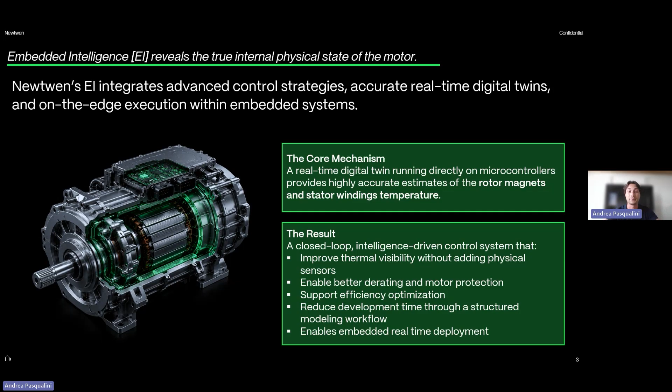Before passing the word to Francesco to dive deeper on the technology, maybe we can spend a couple of words on who Newtwen is. Newtwen was founded in 2020 in Padova, which is a city located in the northeast of Italy. And our mission is quite unique, and is to enable real-time thermal awareness

inside the embedded systems. Our expertise combines mainly three domains that traditionally operate separately. In fact, we have expertise in multi-physics simulation, embedded control systems, and AI and machine learning for physical systems. The result of this expertise is Twin Fabrica, which we will see shortly.

Twin Fabrica is our software platform that was designed and developed to develop, validate, and deploy embedded thermal digital twins inside the microcontroller units of your components. What makes the product unique is that the workflow is designed end-to-end. In fact, in Twin Fabrica, you can start from a CAD geometry and finite element simulation, and it will bring you with a unified workflow all the way to deployment on embedded hardware.

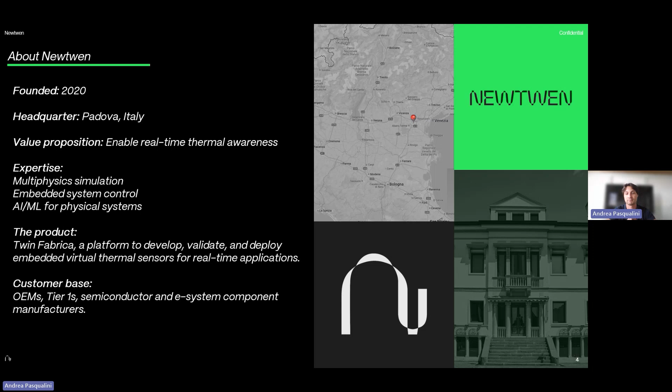Currently, we are mainly working with OEMs, tier ones, semiconductor companies, and electromechanical system manufacturers. And the common challenge that we are seeing with these customers is how do we bring physical intelligence closer to the real-time control.

Today, the webinar will be focused on eMotors, but the approach can be applied to different applications as well by using the same methodology in inverters, batteries, onboard chargers, power electronics, and other thermally constrained embedded applications. You can improve the thermal visibility and therefore the controls and the derating strategies of your components.

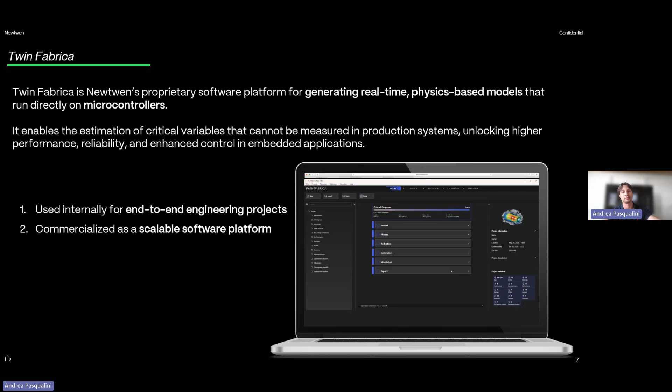As mentioned, super briefly, Twin Fabrica is the engineering platform that powers and empowers this entire process. It allows us and our customers to transform high fidelity physics into executable embedded intelligence. It's mainly used by ourselves, but it's also used by our customers. The workflow looks like this.

Everything starts from the physical system, from the CAD geometry that is imported directly into the platform. Second, the finite element simulations are created to capture the thermal and physical behavior of the systems. Third, model order reduction techniques compress those high fidelity simulations into lightweight real-time models. And then there is the AI piece, the AI calibration that is used to refine the model accuracy using ground truth experimental data. The final step is the export. The final code is deployed directly into the target embedded hardware.

I think it's important to mention that the importance here is not the individual steps, it is the continuity of the workflow. In fact, instead of having disconnected tools and fragmented validation loops, Twin Fabrica and its process becomes integrated from simulation to the embedded deployment. Of course, you can imagine how this workflow dramatically accelerates development cycles while at the same time improving consistency between virtual and real-world behavior.

Now that I saw that some people joined, maybe we can revisit what we have seen in the first slide, so the original problem, with a slightly different perspective. The challenge, as we mentioned, is no longer only thermal protection. The real challenge that we are seeing today is thermal visibility. When internal physical states remain hidden, systems are forced to operate conservatively. But once the embedded system gains real-time thermal awareness, entirely new optimization strategies can become possible. Control systems can become adaptive, and the derating can become dynamic.

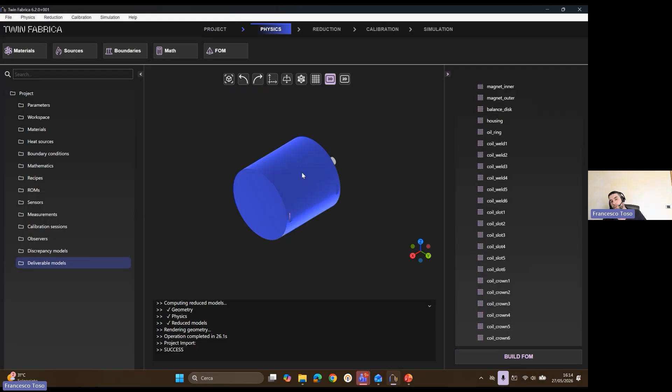Let's see the workflow. Let's see the process of our technology and why we claim that thanks to this platform, we make scalable the process of bringing high fidelity simulation models inside the microcontroller units. So everything starts from the import of your high fidelity simulation. So it means that the geometry is already present. Here I can show you an example.

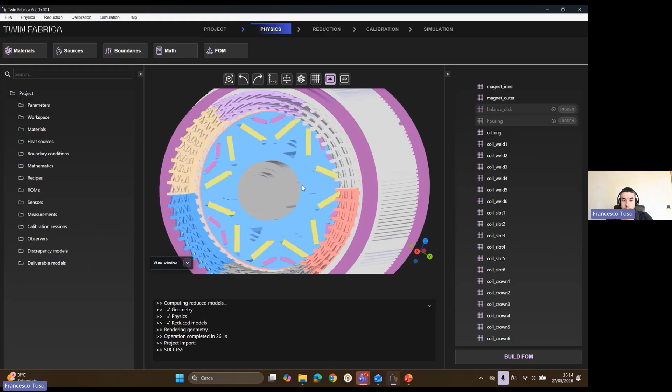Inside Twin Fabrica, there are many software libraries. One of them is a CAD kernel that allows you to do all the Boolean operations in order to import the STEP file, but also other CAD kernel file formats. This is one of the inputs that you can select for your final geometry. In this case, this is an IPM, interior permanent magnet, with hairpin technology.

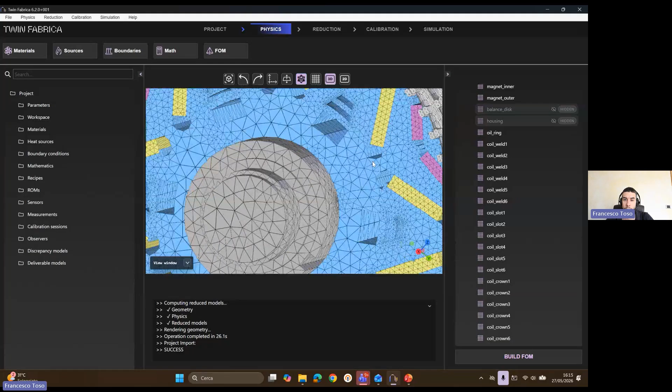It's oil spray cooling technology for this particular motor concept. There is another input, the mesh file, so you can directly import the mesh file from ANSYS Fluent, COMSOL, STAR-CCM+, doesn't matter. Or you can basically create the mesh inside Twin Fabrica. So if you want to start from the geometry, there is no problem.

Inside Twin Fabrica, there is also the mesh generator engine that allows you to create a 3D mesh for finite element analysis and to solve the partial differential equation related to the heat transfer. Why the heat transfer? Because temperature is the state variable most critical for and most tied to safety and to performance. In particular for oil spray technology, you would like to estimate the hotspot across the windings configuration. You would like to predict the temperature in the magnet in order to avoid demagnetization and losing efficiency in an irreversible way.

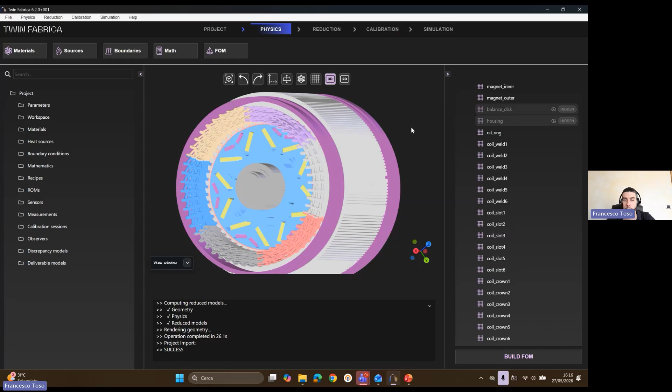There are many reasons why temperature is very relevant for electric drives, mostly in automotive, but not only. And also the problem is that the state of the art of hardware, the classical NTC placed in the winding or in the stator stack, is not enough to predict the hotspot dynamics, the hotspot resolution across this motor technology. And most of the time, you cannot measure directly in the spinning part, the rotor where you have the magnets. However, our companies have very good models.

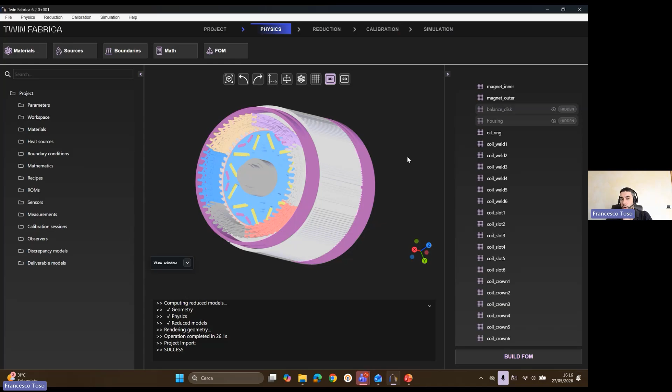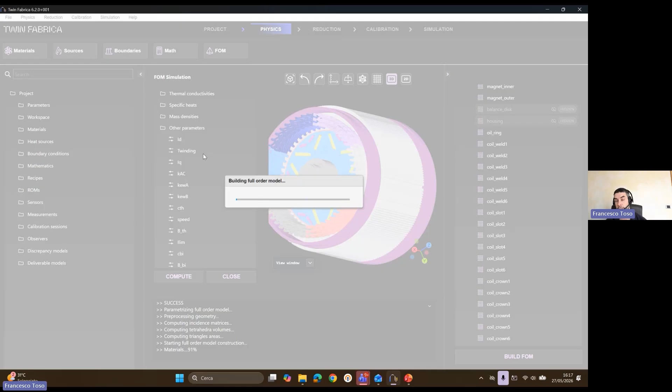So in fact, the first step will be the integration inside Twin Fabrica of the high fidelity simulation model. And with that, as we can see in this case, you can compute changing boundary conditions, material properties, heat sources, etc. You can perform the high fidelity simulation, solving the partial differential equation related to this finite element model. It means that inside Twin Fabrica, we also have the FEM solvers to solve the distribution of the temperature, the heat transfer equation, in order to get the temperature solution across our electrical machine.

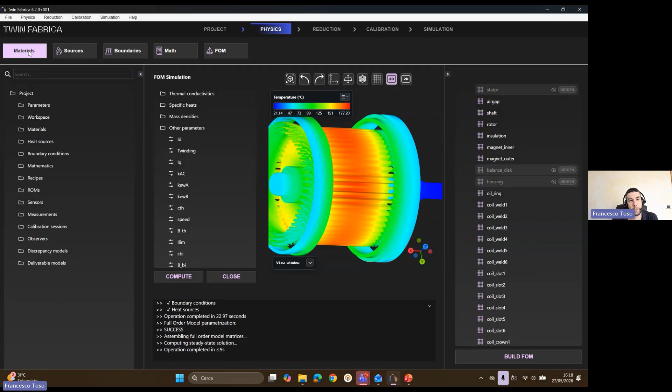So as you can see, for the sake of time, this was just a steady state simulation computed on my laptop, but with Twin Fabrica you can simulate also transient, frequency domain, steady state, whatever, and you can use it to double check if the input of the model has been set properly: the material properties, the heat sources, and the boundary conditions. However, this is just the first step.

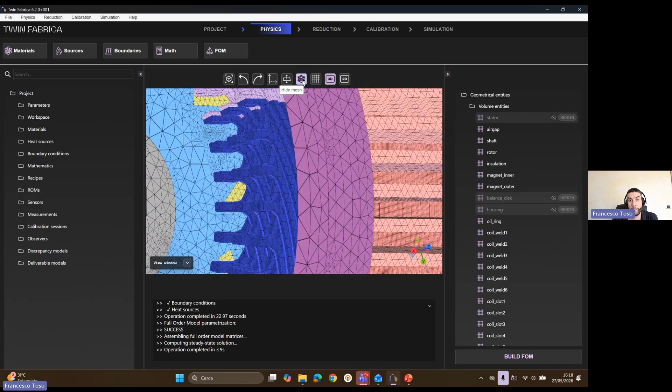The scope is to basically create a model that can replicate this kind of behavior in real time. This model is quite good. It has, in this case, more than 1 million degrees of freedom, coinciding with the nodes of the mesh describing this geometry. But these kinds of models, for memory reasons and computational requirements to solve the algebraic equations of the finite element analysis, of course don't run inside a microcontroller unit.

There are tools, there are methodologies, and inside Twin Fabrica in particular, we have implemented a nonlinear model order reduction library, the first commercial nonlinear model order reduction library available in the market, which can easily tackle, for example, radiation and advection. So considering this kind of physics in the finite element analysis of your model, as well as temperature dependency, material properties that depend on temperature, as well as the heat sources. So in this case, using our model order reduction, you can obtain a model of just 31 differential equations describing the full order model of more than 1 million degrees of freedom.

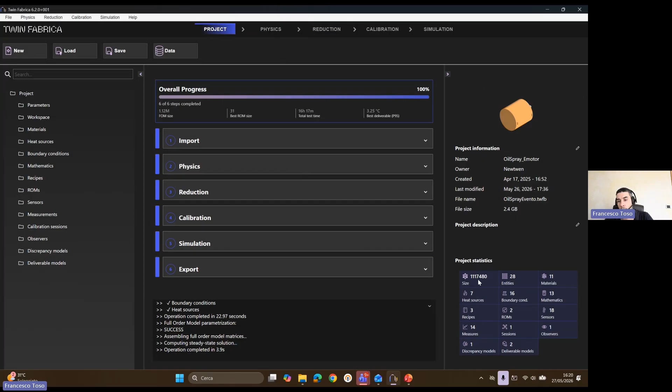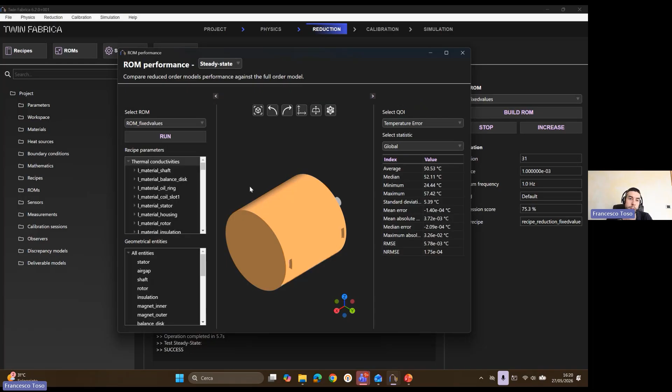And what you can do inside Twin Fabrica is the analysis. So basically you can evaluate the fidelity of this reduced order model with respect to the full order one. For example, you can run several conditions, steady state, frequency domain, or transient, to double check if the accuracy of the reduced order model with respect to the full order one, changing once again boundary conditions, heat sources, material properties, and so on, is good enough. So in this case, you can see the error plotted. In every single node, you can see the error between the full order model and the reduced order one.

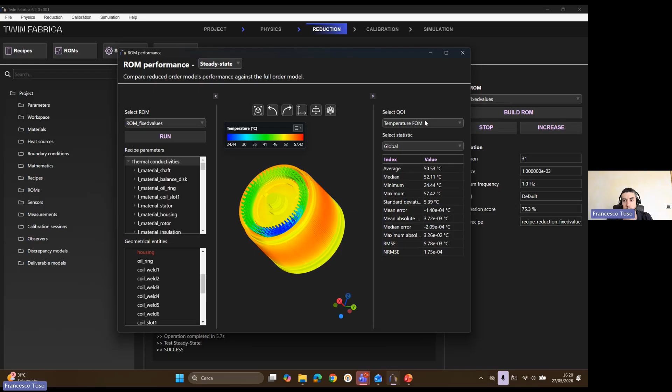And if you go here, you can instead see the temperature distribution of the full order model with certain boundary conditions and heat sources, and the temperature distribution solving the model of just 31 equations, but then projecting the solution back onto the full mesh in order to get the resolution of the temperature gradient.

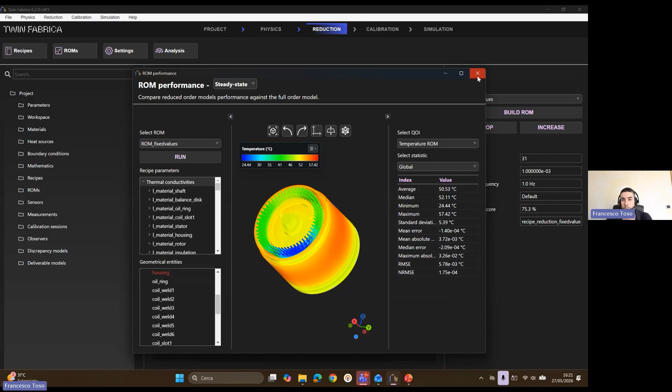So let's say this is a kind of analyzer of the fidelity of the reduced order model with respect to the full order one. So how good is the surrogate model, the compressed version, in order to address real-time feasibility inside a microcontroller unit? Because now this model size is quite manageable for a microcontroller.

And you can compare the fidelity of this reduced order model on several simulations. Recipe, you can change many things, whatever you want. You can do your sensitivity analysis with respect to the full order one, so with respect to the first high fidelity model. However, this is not enough, right?

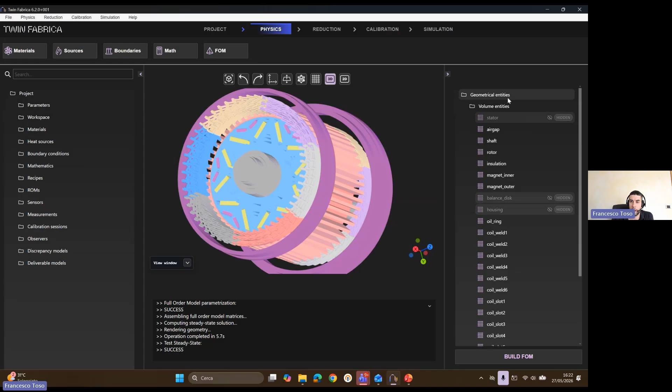Because we all know that the high fidelity models, the design ones, are good, but they do not represent the model as manufactured. Why? Because maybe there are some nonlinearities that have not been taken into account. Because the heat sources, so the power loss distribution, have some uncertainties or some error with respect to reality, or because some material properties are not known 100%.

So there are many reasons why, when we go on the test bench and we measure with a thermocouple, for example, across this winding, the temperature behavior of the measurement setup and the experiment and the simulated one differ. They have some error. There is some residual, because the perfect simulation doesn't exist, right?

So the fidelity that the reduced order model can achieve in its first instance is compared using the ground truth, that is the simulations, so the full order one. Now we need to move a step ahead. We need to calibrate this full order model or the reduced order one. Of course, it's much cheaper from a computational point of view to calibrate the reduced order model, which is still a physics-based representation of the full one.

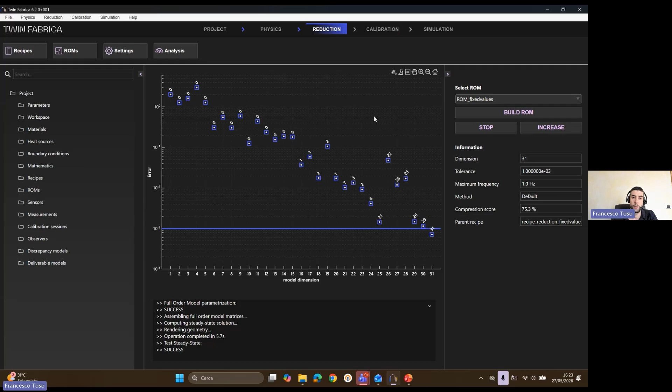So what do we need to calibrate? To calibrate, we need, in the first instance, to place sensors in the exact position where the real experimental setup is measuring. So, for example, in this particular case, we are positioning the virtual sensor. We are selecting the node of the mesh as close as possible to where, in the real test bench setup, the thermocouple has been soldered.

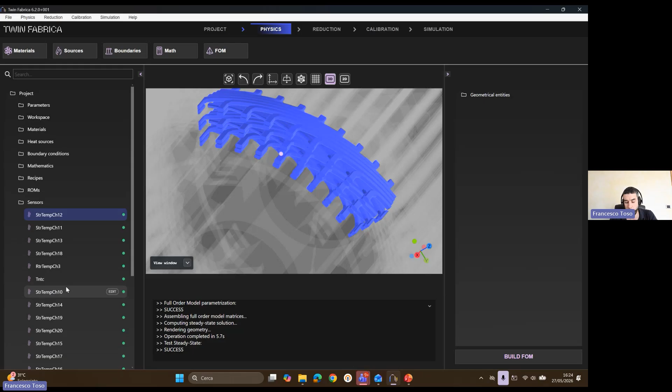And why are there several sensors here? Because in this case, we are talking about a special prototype that the customer has used to collect the data, to do all the functional testing. And they are measuring so many sensor points in the stator winding, mostly in the end winding and in the core, because this coolant system was an oil spray one. So it's very hard to simulate the oil spray CFD to get the right heat transfer coefficient map.

In this case, the customer preferred to get a good experimental data set. So they did a really very good campaign, checking the temperature in multiple points. In this case, they have generated many virtual thermal sensors, because the aim of the customer was to have all these virtual thermal sensors in production, not with the real thermocouple, but just with a piece of software.

So from here on, the next step would be to transform a model as designed into a model as manufactured in terms of accuracy. We need to achieve industrial grade accuracy to rely on virtual sensors as if they were the real ones, okay? So in this case, the first step was to place the virtual sensor exactly in the same geometrical position where the real sensor setup has placed the thermocouple, the PT1000, whatever sensing technology you're using in your test bench.

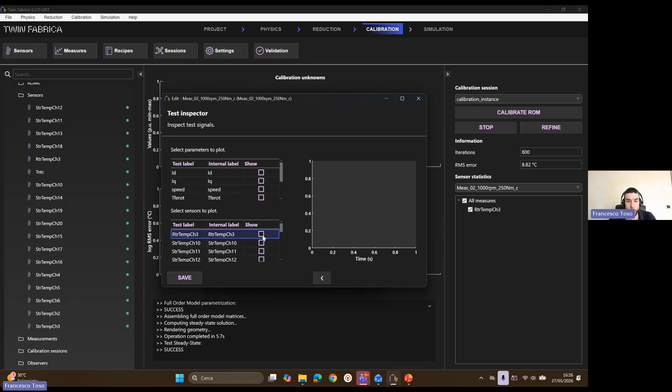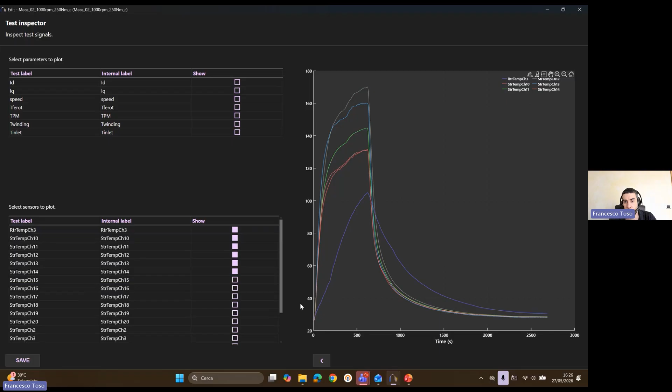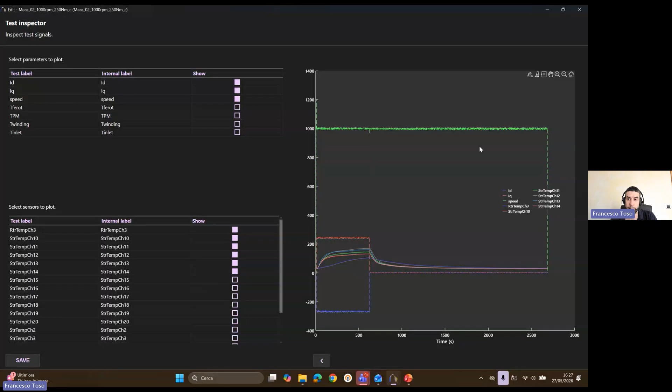And what you can see, for example, is the different, I can enlarge the screen, behavior of the stator in different points and also the rotor, given certain ID, IQ, and speed profile, okay? So these are the classical data sets where you have the phase on and the phase off in order to record the free evolution of the system. This is a classical measurement setup, temperature recording and electrical variable recording, in order to use this data to calibrate our model.

So once you have imported the data, the next step would be to calibrate. So we will calibrate the reduced order model through Twin Fabrica. Inside Twin Fabrica, there is also an optimization library, which in first instance will calibrate the physical parameters, so material properties, heat sources, boundary conditions, potential uncertainties that you want to model, to get the right accuracy with respect to the real test bench.

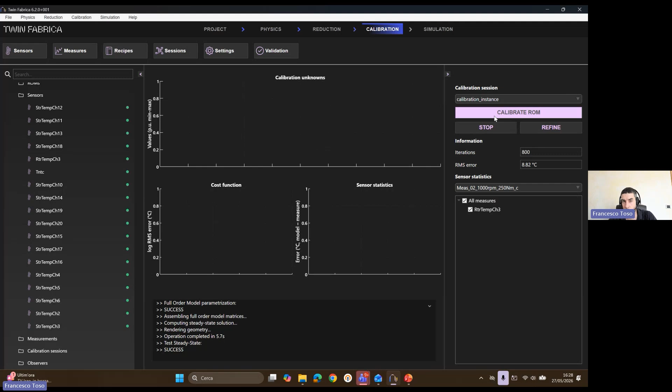However, sometimes just a physical calibration, so just moving material properties and boundary condition uncertainties, is not enough. Because many times, mostly for the electric motor case, in the microcontroller unit, where you have to implement your model and control the final thermal behavior of your electric motor, you don't have some relevant information to simulate the thermal model. Just an example, the coolant flow, or the pressure of the oil, or the temperature of the oil itself.

Most of the time, these variables that are relevant to model the boundary condition of our model are not available, and they are not constant. So we cannot imagine to place them like a constant value of the coolant flow and the coolant temperature, for example, to impose 10 liters per minute and 50 Celsius degrees, because in the real application they are time varying and most of the time unknown, in the sense that these two variables in the microcontroller unit where the final model must be implemented are not known. So in this case, you have to do something more.

In this case, you have to enhance, you have to empower, if you want, your physics-based reduced order model with an edge AI one. So with a specific data-driven model, and we have a set of libraries of them that you can directly use together with your reduced order model in order to train the parameters of this edge AI model to infer the unknowns, or the residual between the calibrated physics-based model and the ground truth data.

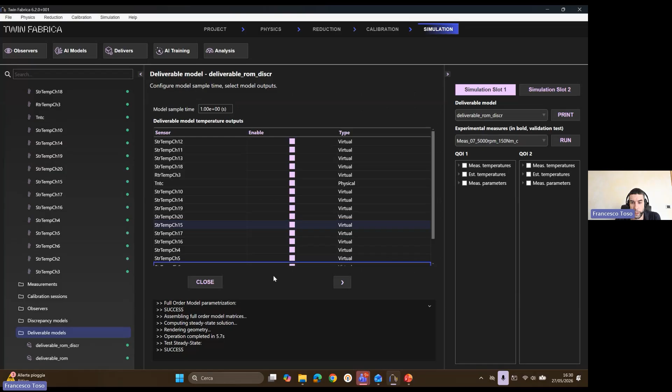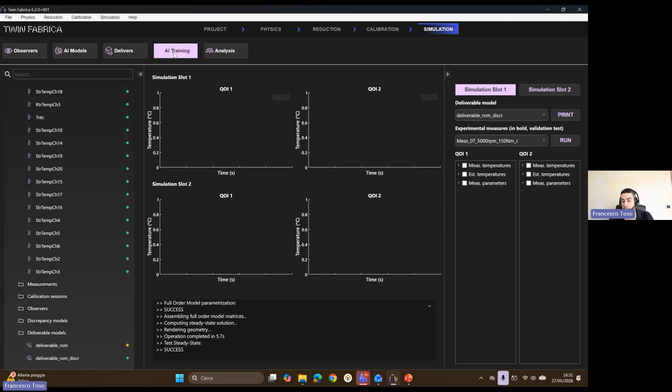So in this case, let's see if we can execute, yes, let's enhance the reduced order model with an AI one that we have already trained. Also inside Twin Fabrica, you have available the trainer of these models. So in the same identical platform, as you can see, you have many libraries, a very large technology stack of software where you can manage everything from the import of the CAD to the code generation of the firmware to program your microcontroller unit, which we will see in a moment. Passing through also the training, so there is also the artificial intelligence model trainer inside Twin Fabrica that you can directly use with no code.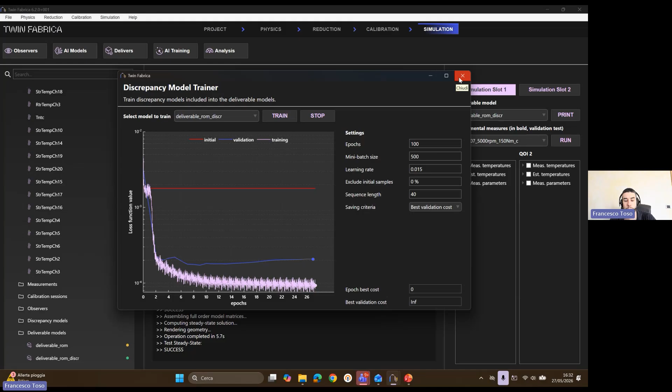Like in this case, you can set which tests from the ground truth measurement to use for calibration and for validation, and you can set some of the hyperparameters and press train. And in a couple of hours, 1 hour, it depends on the data set and on the size of the model library that you choose, it's capable of calibrating the parameters of the network.

It could be different kinds of networks that you can select, attached with the physics-based ROM in order to enhance the accuracy. So now, if we have a look, in violet with continuous line we have, let's make a zoom, in order to get the error during transient. For example, in continuous you have the IR camera recording, and in the dashed line you have the model estimation. Of course, you can see the error in all the temperatures.

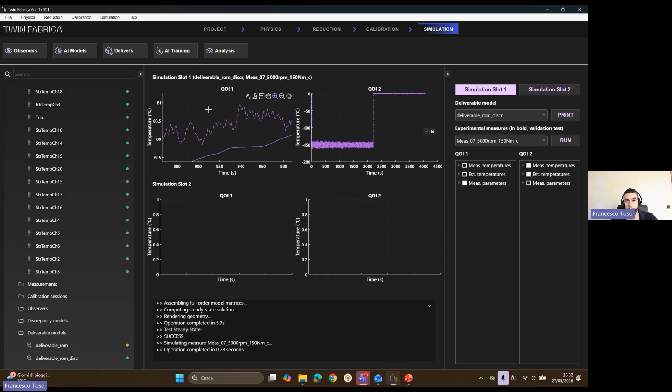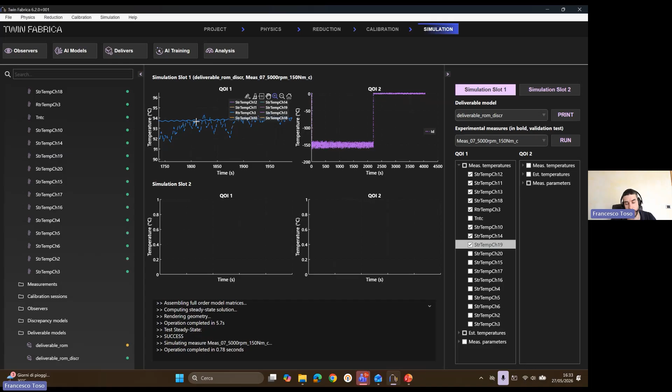So we can see, for example, in this case it was an oil spray cooled. If the distribution of the temperature is preserved, as you can see, the model is quite good in predicting the temperature compared to the one of the NTC or the thermocouples. And if we change test, we can go higher with the speed. Of course, the accuracy is preserved. In this test, maybe also the coolant flow was changed. Who cares? It was not an input of our model. However, this dashboard gives you the feeling of how good your model is, how robust it is, and if it is industrial grade.

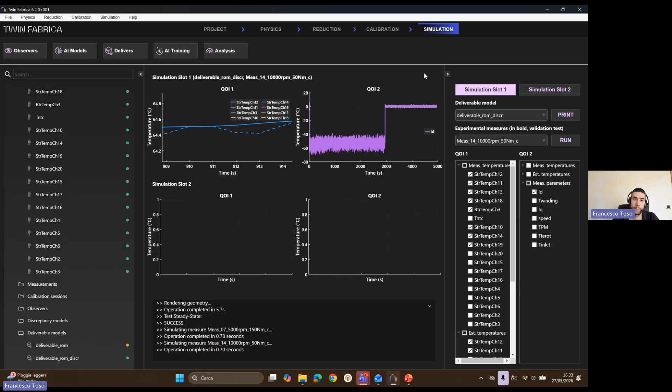So once you are satisfied, the last step to do is the export. You can go back into the first dashboard here, and you can export the model using a Simulink white box block that can be directly plug and play into your motor control Simulink simulation model, or we can directly generate the C code, so a firmware library that can be easily compiled in order to program your microcontroller unit, with the documentation and the library, in order to integrate the final model into your hardware system.

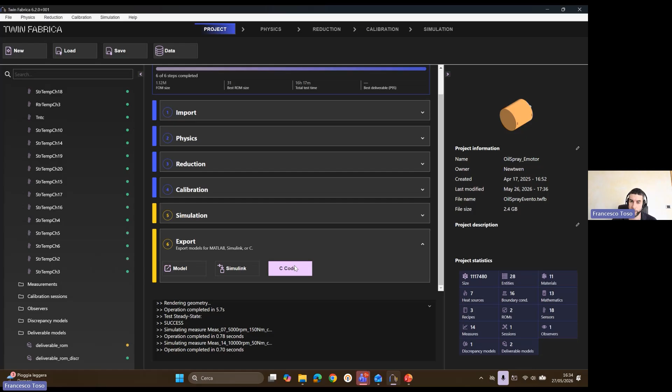So this was just a recap of how to operate in Twin Fabrica and why it's relevant to get a model that is capable of predicting the temperature in the hotspot, in this case the end winding and the core winding, but also in the magnets. And why is it relevant? Because at the end, what we want to do is unlock the motor efficiency. Using the same hardware, we want to obtain a software layer capable of properly managing the ID and IQ current references, such that you still satisfy the PI controller of the speed, so the torque request from the slow loop controller of the electric drive, but you increase the efficiency.

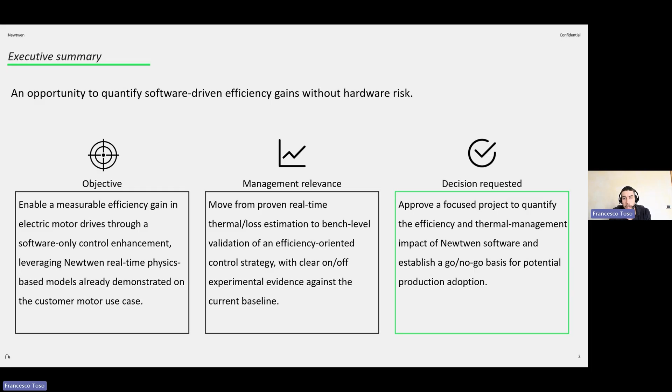Why? Because this is the goal of our customers. We want to improve the efficiency and have a very good thermal management of the hotspot and of the temperature of the magnet. To do that, usually our customers have lookup tables. You go on the test bench and define very large 4-dimensional lookup tables. So you have ID, IQ measurement, the speed, you measure the temperature maybe in the NTC in the stator, and you try to move ID and IQ on the test bench in order to record the torque request with the minimum loss in the system.

Other customers instead go in a more raw way: for them, the minimum loss is the MTPA, the max torque per ampere. However, this is not true, at least not for all the points. For example, when the speed is in a medium range and torque is low, which is quite the case for the automotive sector, an operating point where you spend a lot of time in the lifetime of the motor, the MTPA point is not the most efficient one, because the iron losses and the magnet losses count more than the Joule losses. So you prefer to change ID and IQ to move to another point preserving the same torque but minimizing the iron and permanent magnet losses. Most of our customers do it by experiments. Others don't; they go just MTPA and field weakening.

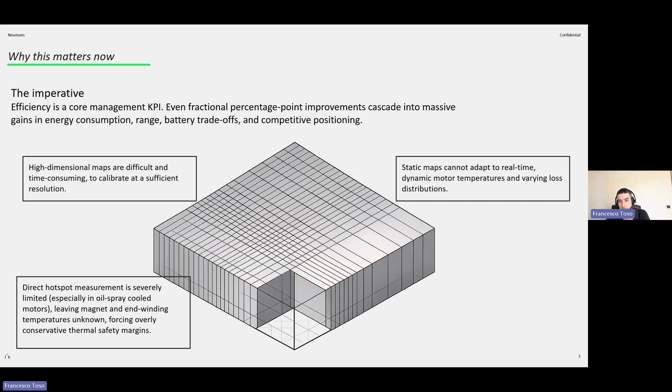So even if you have a very good, high resolution lookup table calibrated by means of real experimental results, and you implement this huge lookup table inside the microcontroller unit, most of the time you're not precise enough if you don't have a precise thermal model predicting magnet temperature and winding temperature. Why? Because it's relevant in order to place the right point inside this LUT. It's the input.

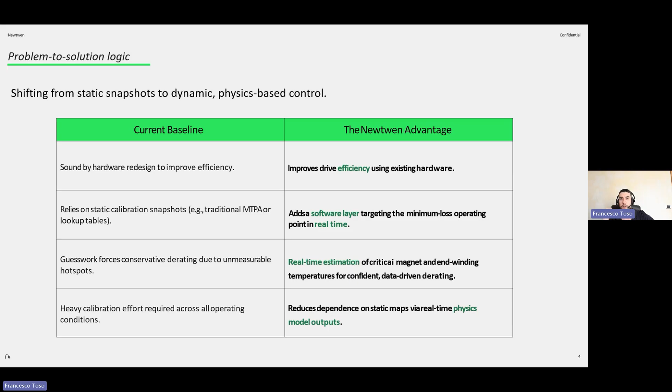So what we propose instead is to implement our model. Instead of having lookup tables, the input of our reduced order model is the power loss. So we still have a power loss model, an analytical version of the losses distribution inside the system, that can be quite well calibrated on the test bench, at least the total losses. The distribution will be validated through the thermal behavior. And you can use this model in closed loop control to enhance the efficiency. Now we will see how we do that.

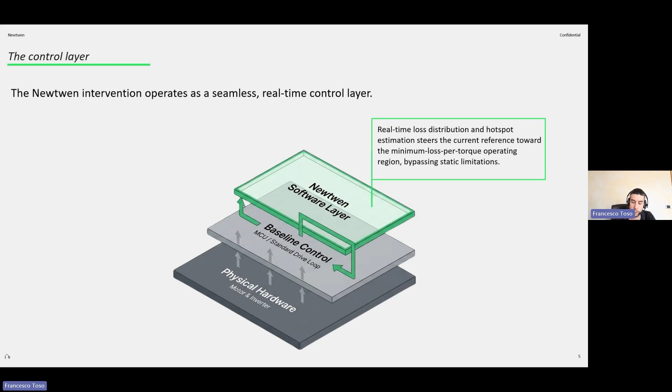Once you have finished with the model generation, as I've shown before, it's quite easy to generate C code. This C code will be a software layer that is quite non-invasive for your motor control strategy, in the sense that we do not touch your MTPA, we do not touch your PI controllers, we just sit on top. This firmware layer can be easily implemented within a task of 1 millisecond or 10 milliseconds of your electric drive, and it will take as input the ID, the IQ, the speed, and the temperature of the unique motor sensor you have there.

As I mentioned before, inside there is the power loss model and the thermal model that you will easily export from Twin Fabrica. So it's a piece of library that can be directly plug and played in the task of 1 millisecond. The output of this model will be the power losses distribution and also the temperatures of the magnet and the hotspot, covering all the virtual sensors that you have modeled inside Twin Fabrica. So you can really track which is the hotspot in the system and control it. And we also have the control logic.

It's the derating strategy that takes as input the total losses and changes the ID and the IQ so that you hold the same identical torque, so you satisfy the speed request from the PI controller, but move the current reference to the point of minimum loss. This is the kind of control that we call min loss per torque. It is only possible if you have a very good power loss model, which could potentially also be your lookup table, but also a very good thermal model running in real time, because it's the input, for example, of your lookup tables to decide the right correction for the ID and IQ references in your electric drive.

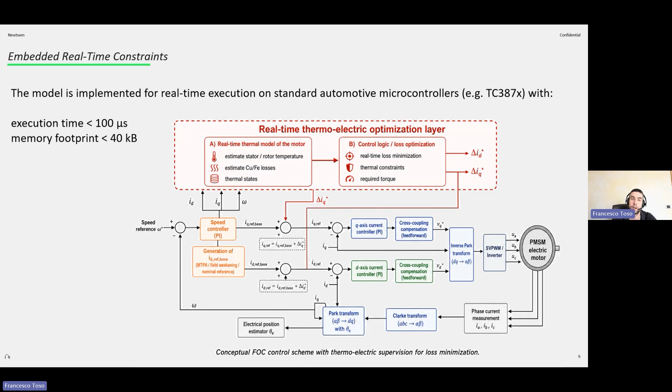That would be one of the KPIs. The other one would be the derating test, so we can see how effective the closed-loop derating control is, always with and without this firmware layer, in order to have tangible results for validation and for the go or no-go into production with this firmware layer.

So the first question is: have you looked at slip frequency optimization in induction machines to obtain optimal efficiency performance? Very nice question. Not specifically, but with the induction machine we have something I think is quite related. You are in field-oriented control with an induction machine only if you can properly estimate the rotor resistance of your induction machine.

However, rotor resistance, once again, is temperature dependent. So if you have a very good thermal model, you can estimate the rotor resistance in real time with high accuracy, and you are effectively in field-oriented control for the entire lifetime of the electric motor. Otherwise, if you just measure the rotor resistance, for example, when the rotor is at 70 degrees, you will be in field-oriented control only at the instant when the rotor is exactly at 70 degrees.

And this is quite easy also to be tested on a test bench, because if you ask a step, a square wave, let's say, of Q current with the induction motor, you should record a square wave torque response if you are in field-oriented control.